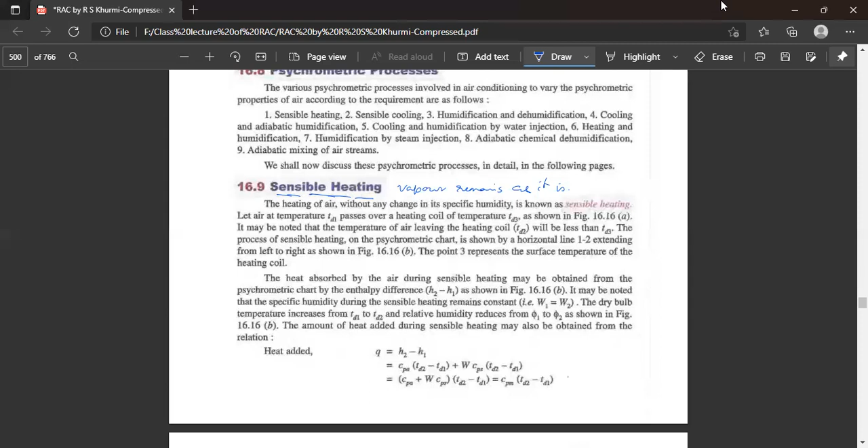Here the air is coming in, with temperature TD1. The heating coil shown here has steam moving inside it, so it is heated more or less at the temperature of the steam. The air passes over this coil and gets heated, coming out at temperature TD2.

So what happens? The air at temperature TD1 passes over the heating coil of temperature TD3. It must so happen that the temperature of the heating coil is TD3, and the temperature of the air coming in is TD1. The temperature of air leaving the heating coil will be less than TD3, but more than TD1.

So in the process of sensible heating on the psychrometric chart, point 3 represents the surface temperature of the heating coil.

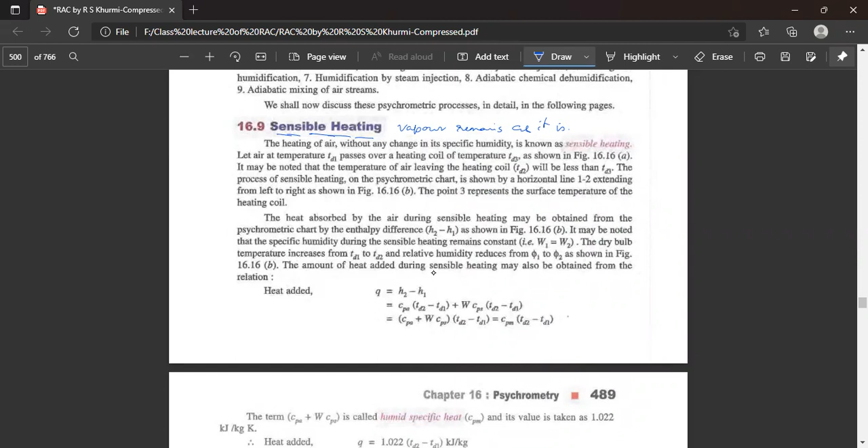The sensible heating, sensible cooling - now, the heat absorbed by the air during sensible heating may be obtained from the psychrometric chart by the difference H2 minus H1, where H2 is the enthalpy or heat content at the heating coil, and H1 is the heat content of the incoming air.

The amount of heat added is given by H2 minus H1, where the specific humidity during sensible heating remains constant, that is W1 is equal to W2. So the amount of vapor present in the system is not supposed to change - specific humidity remains constant.

Now, what is the sequence? Point 3, the heating...

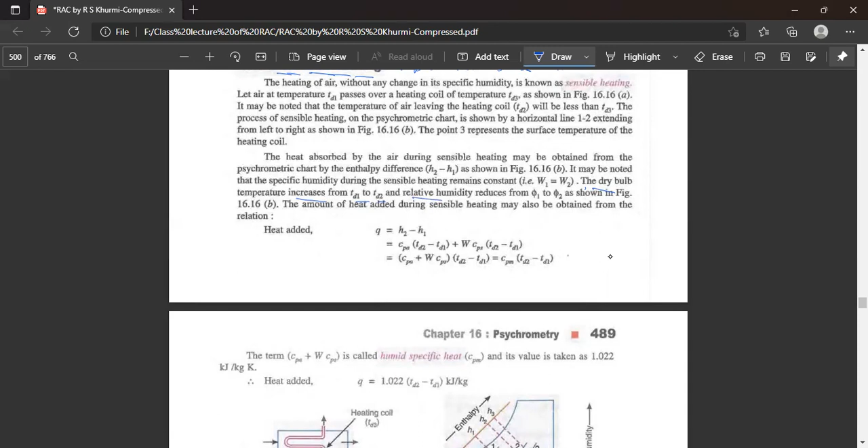The heat absorbed by the air during sensible heating may be obtained from the psychrometric chart. As told, the specific humidity - amount of moisture present per kg of dry air - is not changing, remains constant, that is W1 is equal to W2. The dry bulb temperature increases from TD1 to TD2, and the relative humidity reduces from phi1 to phi2, as the chart follows. So what is going on here?

W1 remains the same, and the temperature increases from TD1 to TD2, and relative humidity reduces from phi1 to phi2.

The amount of heat added during this sensible heating is defined by the relation H2 minus H1, or Cp(TD2 minus TD1), plus W times Cps(TD2 minus TD1) - meaning specific heat of dry air multiplied by the temperature rise due to passage of this volume of air over the heating coil, which causes the change from TD1 to TD2, plus W into Cps, that is the amount of moisture present in the air multiplied by the specific heat of the moisture multiplied by the temperature rise.

So after simplification, we get Cpa plus W times Cps, times (TD2 minus TD1), is equal to Cpm times (TD2 minus TD1).

The term Cpa plus W Cps is called humid specific heat, and its value is given as 1.022. But we have this specific heat, which is defined as humid specific heat.

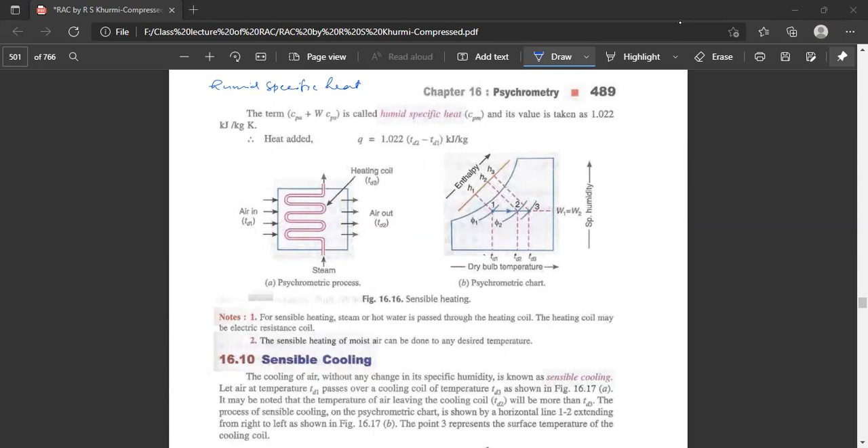Now, what is sensible cooling? Cooling of air without any change in specific humidity is defined as sensible cooling. Air at temperature TD1 passes over a cooling coil of temperature TD3, and it may be noted that the temperature of air leaving the cooling coil, TD2, will be more than TD3.

So here, the temperature TD2 will be more than TD3. The incoming air temperature is given as TD1, and the temperature of air going out from the system is known as TD2. The cooling coil carries cold water or cold air at temperature TD3, which is less than TD2.

The process of sensible cooling is shown here. The respective points: TD1 is plotted here, which is the maximum. TD2 is next, the temperature of the cooling coil, and TD3... I'm sorry, TD2 is the temperature of the cooled air coming out of the psychrometric cooler.

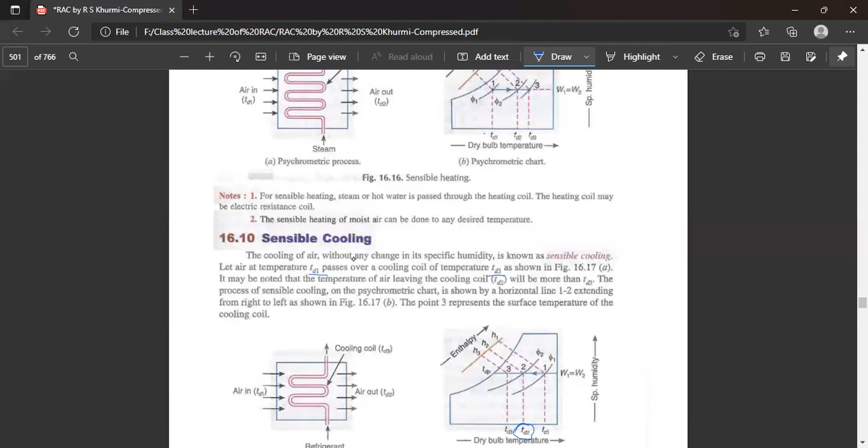The heat rejected by the air during this sensible cooling can be obtained from this chart as H1 minus H2. The amount of heat rejected is the amount of heat present in the incoming air minus the amount of heat going out with the outgoing air, which is the enthalpy difference H1 minus H2.

It can be noted that the specific humidity during sensible cooling remains constant, meaning the amount of moisture present in the air is not changing, it remains as it is. The dry bulb temperature reduces from TD1 to TD2, and the relative humidity increases from phi1 to phi2.

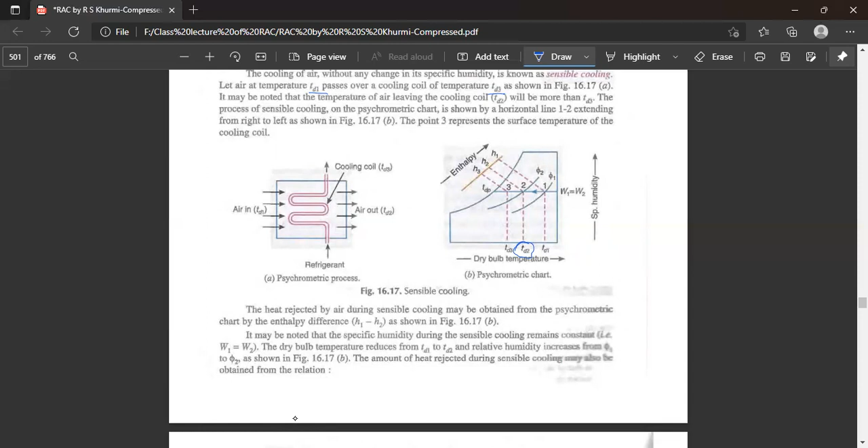The amount of heat rejected during sensible cooling can be obtained from the same relation as above. That is, Q equals H1 minus H2, which is CPA multiplied by TD1 minus TD2, plus W times CPS multiplied by TD1 minus TD2, where TD1 is the temperature of the incoming air and TD2 is the temperature of the outgoing air. W is the specific humidity of the supplied air, meaning the amount of moisture present per kg of dry heated air, multiplied by the specific heat of moisture, multiplied by the temperature drop of the incoming air passing through the coil.

So CPA plus W CPS multiplied by TD1 minus TD2 is equal to CPM. This term is called humid specific heat, CPM, and its value is equal to 1.022. Thus, Q is equal to 1.022 times TD1 minus TD2.

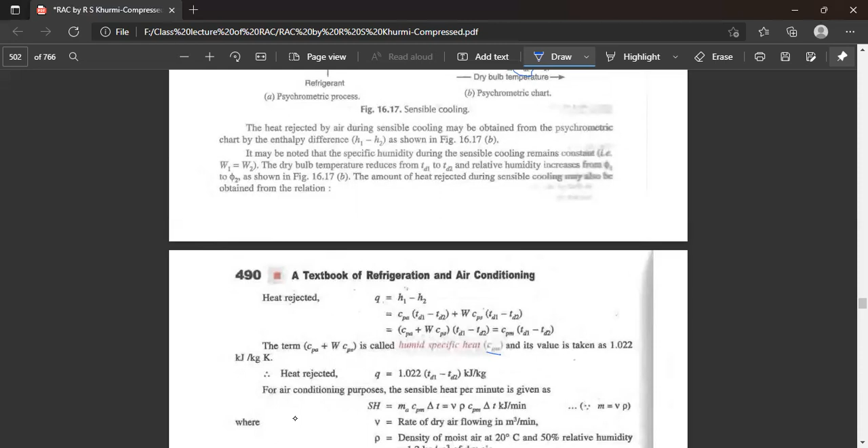For air conditioning purposes, the sensible heat per minute is given as SH, sensible heat, equals mass of air flowing multiplied by CPM multiplied by delta T, or rho into V, where mass equals the volume of flow multiplied by the density of the air, multiplied by specific heat, multiplied by the rise or fall in temperature.

So the rate of dry air flowing in cubic meters per minute is given as V here, and the density of moist air at 20 degrees centigrade, 50% relative humidity, is given as 1.2 kg per cubic meter of dry air. CPM, humidified specific heat, is 1.022 kilojoules per kg per degree Kelvin.

Thus, the density of moist air at 20 degrees centigrade and 50% relative humidity is equal to 1.2 kg per cubic meter of dry air. CPM, humidified specific heat, is equal to 1.022 kilojoules per kg per degree Kelvin, and delta T is TD1 minus TD2, the difference of dry bulb temperature between the air entering and leaving condition in degrees centigrade.

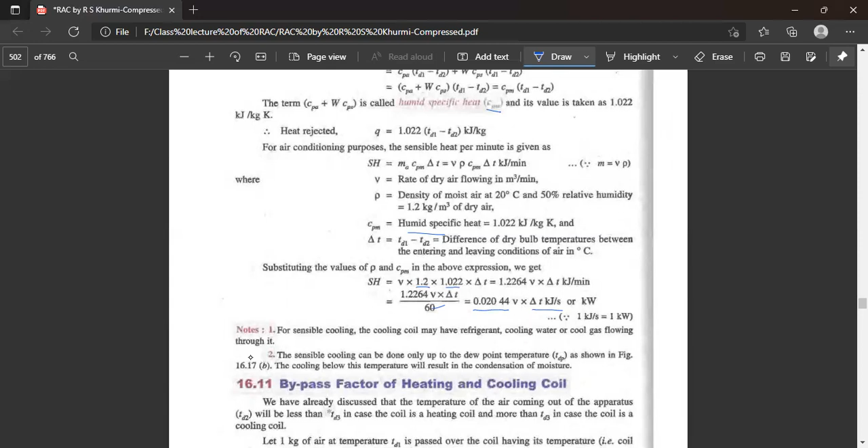By this equation, the amount of heat for cooling is 1.022 into TD1 minus TD2 kilojoules per kg, and the amount of heat added for sensible heating is given as 1.022 into TD2 minus TD1.

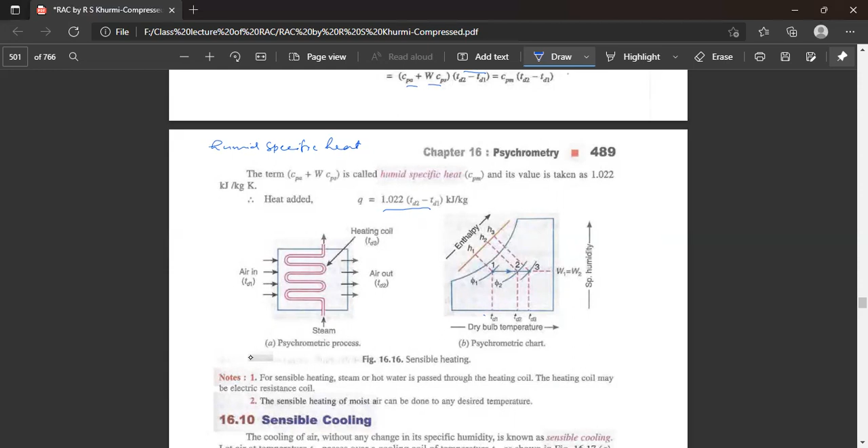As we are mostly interested in cooling the air which is coming inside, we are more interested in sensible cooling than sensible heating, but more or less essentially they are the same. The next topic is another term known as the bypass factor.

We have already discussed the temperature of the air coming out of the apparatus will be less than TD3 in case the coil is a heating coil, and more than TD3 in case the coil is a cooling coil. So there is air coming in, maybe in a hot state or cold state, at a certain temperature given as TD1, and the temperature of the air coming out of the apparatus is given as TD2. It must be less than TD3 in case of a heating coil, and must be more than TD3 in case of a cooling coil.

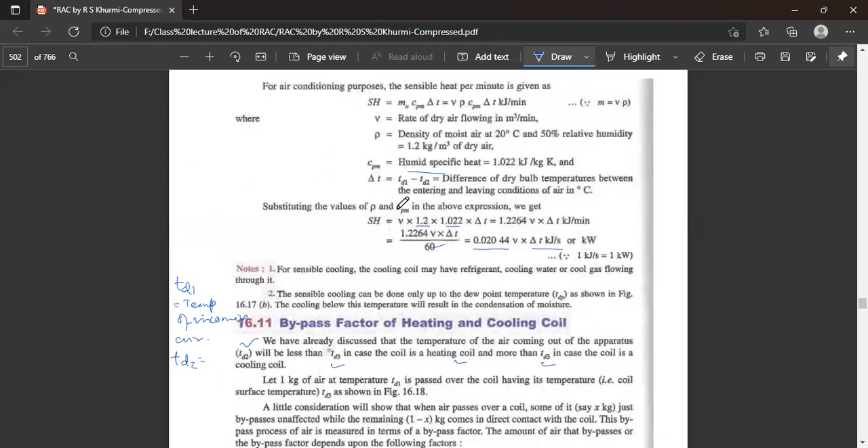So what we are having: TD1, temperature of incoming air; TD2, temperature of outgoing air; and TD3, temperature of the cooling or heating coil.

Now it is very clear that the temperature of the air coming out of the apparatus, TD2, will be less than the temperature TD3 in case the coil is a heating coil, and more than TD3 in case the coil is a cooling coil. So for a heating coil, the temperature of the outgoing air is less than the temperature of the heating coil, and in case of a cooling system, the temperature of the air coming out is more than the temperature of the cooling coil.

So what happens is the heating coil and cooling coil cannot fully heat or cool the temperature of the incoming air which is passing over it.

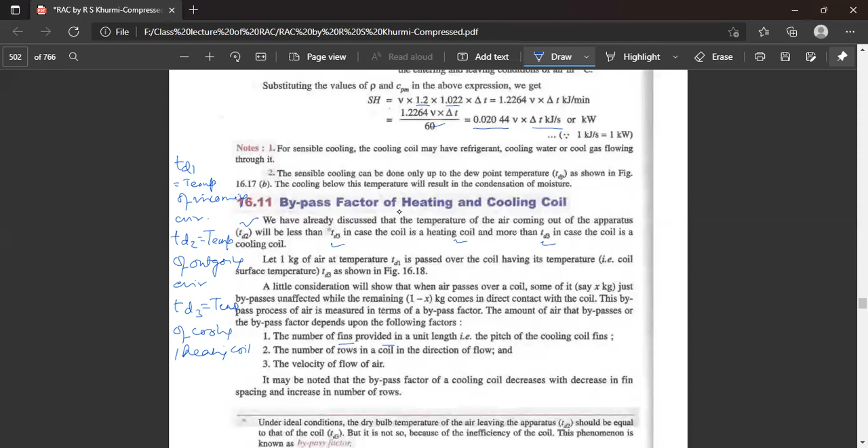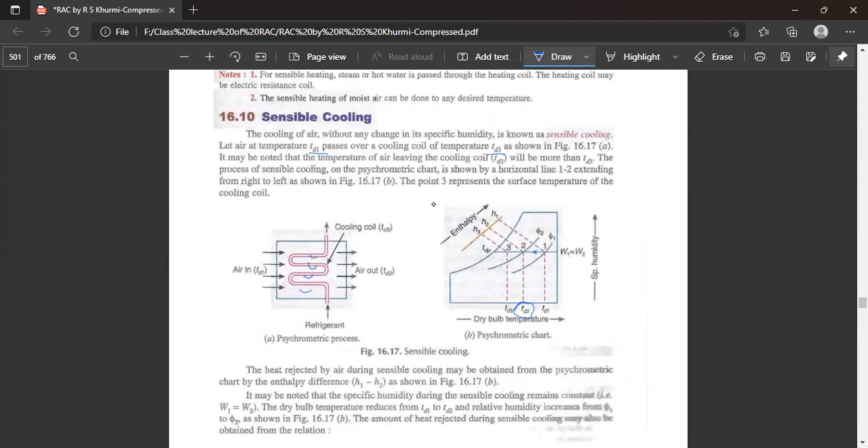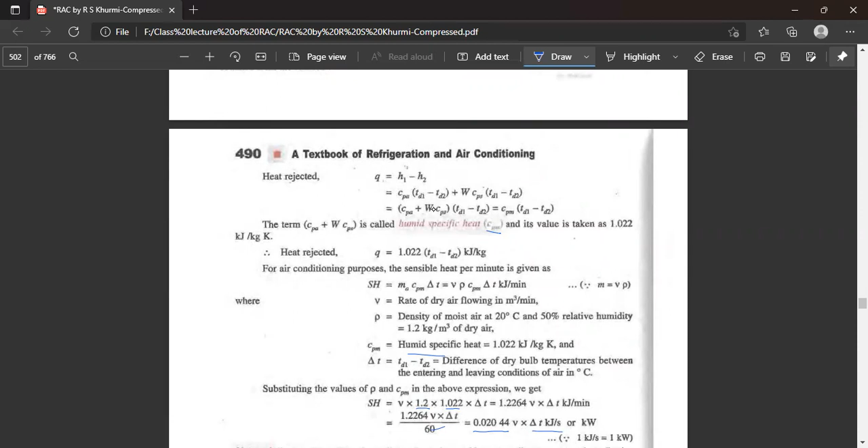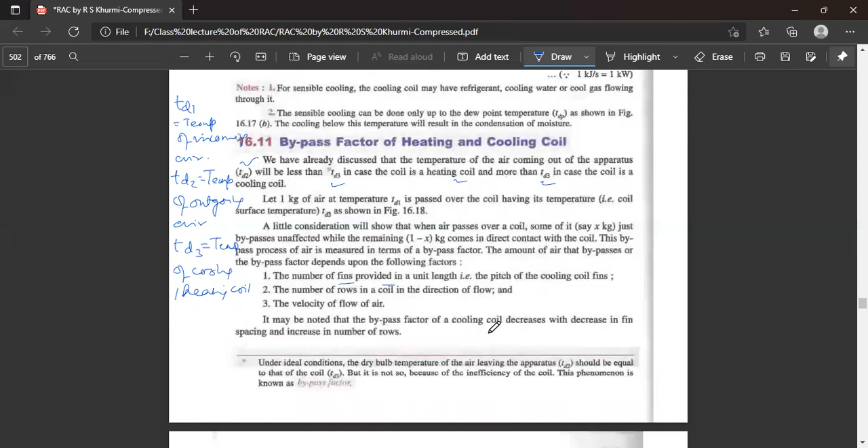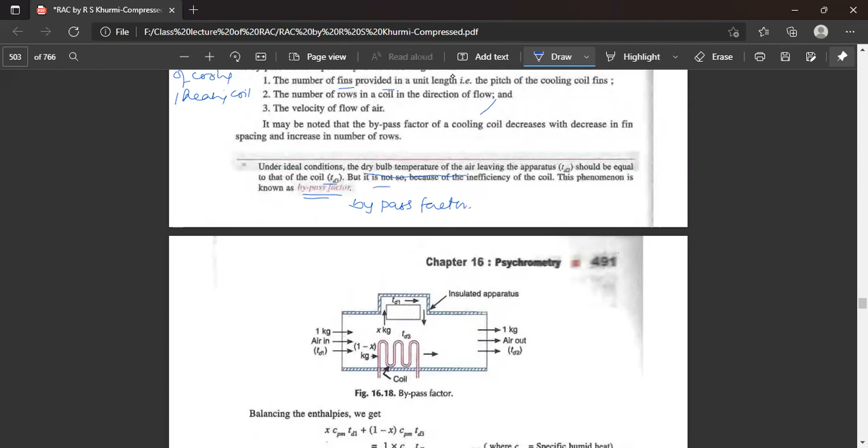So what is shown here? It is a coil here. One kg of air is coming in with temperature TD1. The temperature of the coil is given by temperature TD3, and one kg of air which is coming out is given by TD2. Here, this temperature TD2 is supposed to be equal to temperature TD3, which is equal to the temperature of the coil, but in actual practice it is never so.

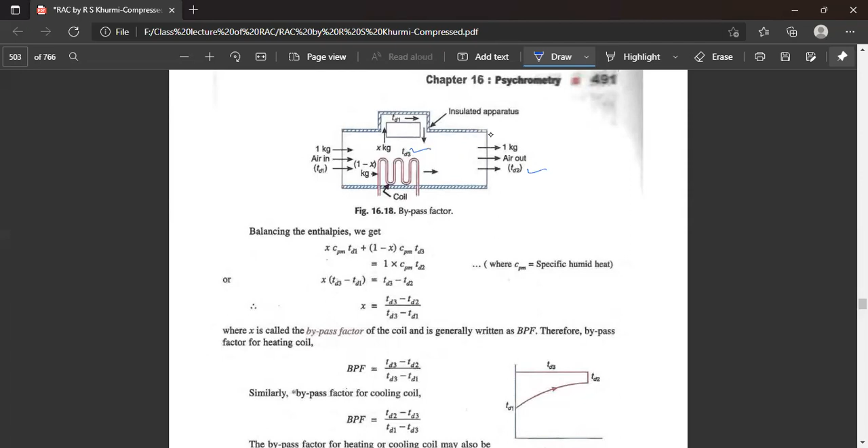Therefore, X is defined as the bypass factor of the coil.

Now BPF is equal to TD3 minus TD2, divided by TD3 minus TD1, where X is the bypass factor, generally defined as BPF. So BPF is given by TD3 minus TD2 over TD3 minus TD1.

The bypass factor of the cooling coil, in the same way, we have to calculate as TD2 minus TD3, where TD2 is the temperature of the outgoing air, TD3 is the temperature of the cooling coil, divided by TD1 minus TD3.

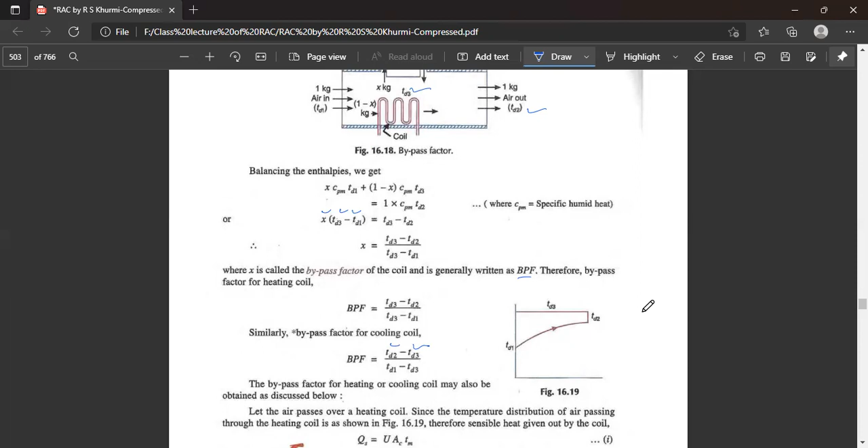The bypass factor for a heating coil may also be obtained as discussed below. Let the air pass over a heating coil. Considering the temperature distribution of the air through the heating coil, as shown in the figure below...

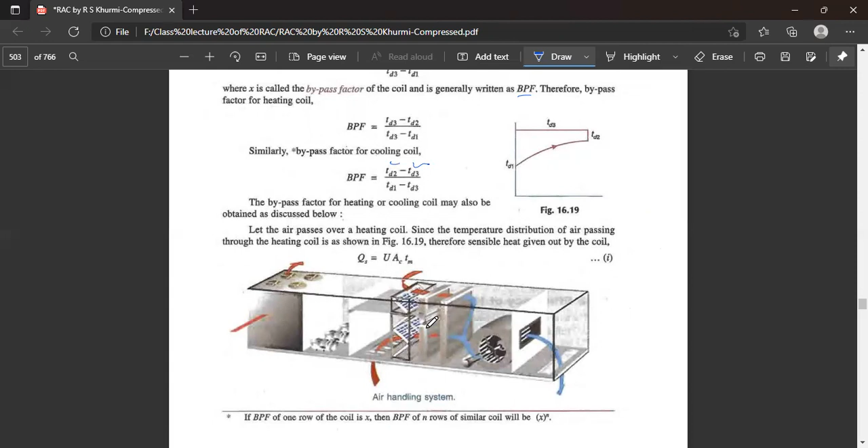The sensible heat given out by the coil is Qs equals U into AC into Tm, where U is the total overall heat transfer coefficient, AC is the surface area of the coil, and Tm is the logarithmic mean temperature difference.

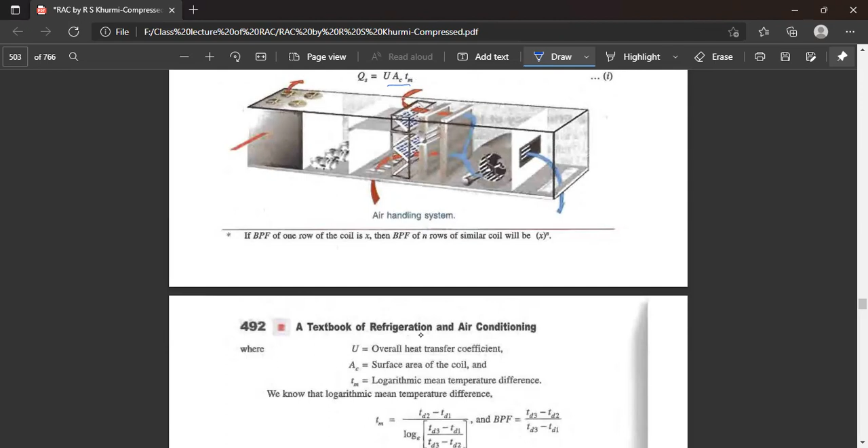We know the logarithmic mean temperature difference, which we calculated already: Tm equals (TD2 minus TD1) divided by log base e of (TD3 minus TD1) over (TD3 minus TD2). And the bypass factor is (TD3 minus TD2) over (TD3 minus TD1).

Now, the equation can be written again as U into AC multiplied by (TD3 minus TD2), and log of 1 divided by the bypass factor.

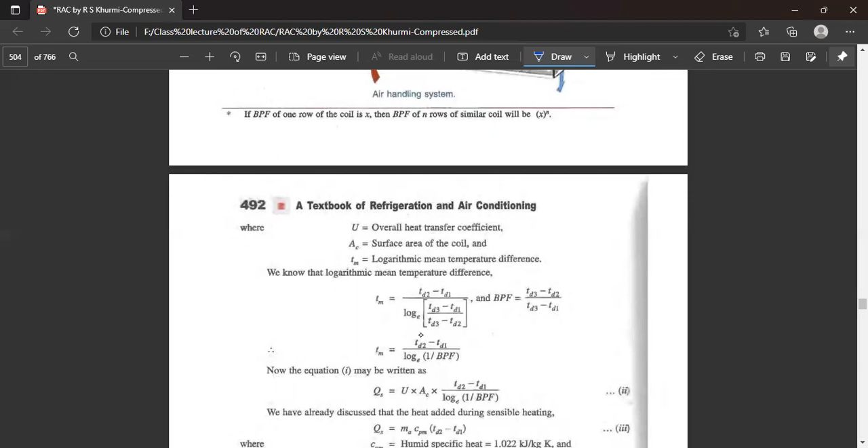We also discussed that the heat added during sensible heating is equal to Qs equals Ma into CPM into (TD2 minus TD1), where CPM is the humid specific heat at 1.022 kilojoule per kg K, and Ma is the mass of air passing over the coil.

If we equate this to the earlier equations, we get U into AC equals CPM log of 1 plus bypass factor, one divided by bypass factor, because the term TD1 minus TD2 cancels on both sides.

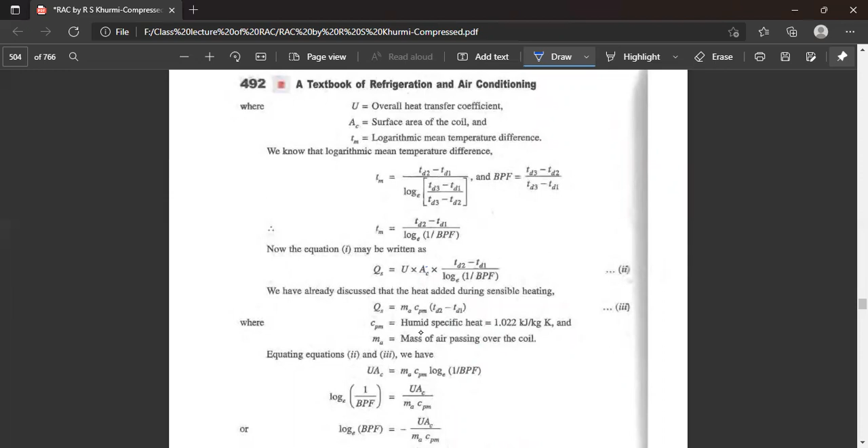So log (1 by bypass factor) equals UAC divided by M into CPM. Or log(bypass factor) equals minus UAC divided by MCPM, so bypass factor equals e to the power minus UAC divided by MCPM, or e to the power minus UAC divided by 1.022 Ma.

Following a similar type of discussion, we can derive this equation for a cooling coil. The performance of a heating or cooling coil may be measured in terms of its bypass factor. A coil with a low bypass factor has greater performance.

Now, the efficiency of the heating and cooling coil.

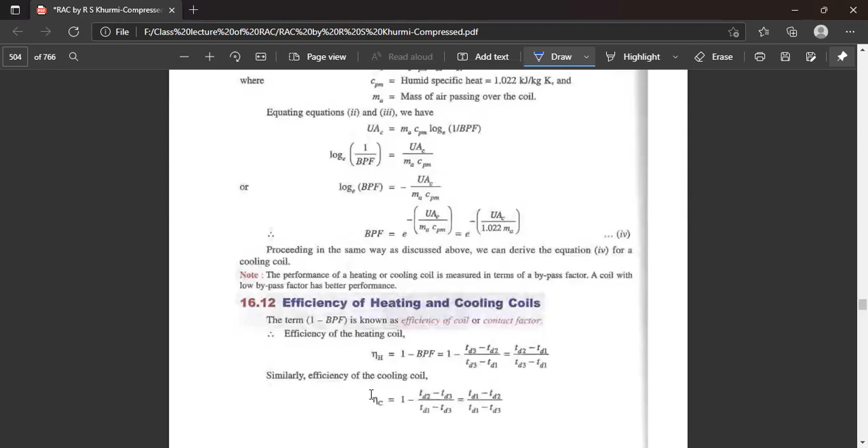The term 1 minus bypass factor is defined as the efficiency of a coil, or contact factor. So we have another factor, the contact factor, besides the bypass factor.

Now, the efficiency of the heating coil is 1 minus bypass factor, which is 1 minus (TD3 minus TD2)/(TD3 minus TD1); putting in the expected values and solving gives (TD2 minus TD1)/(TD3 minus TD1). Similarly, the efficiency of the cooling coil is 1 minus (TD2 minus TD3)/(TD1 minus TD3), or (TD1 minus TD2)/(TD1 minus TD3).

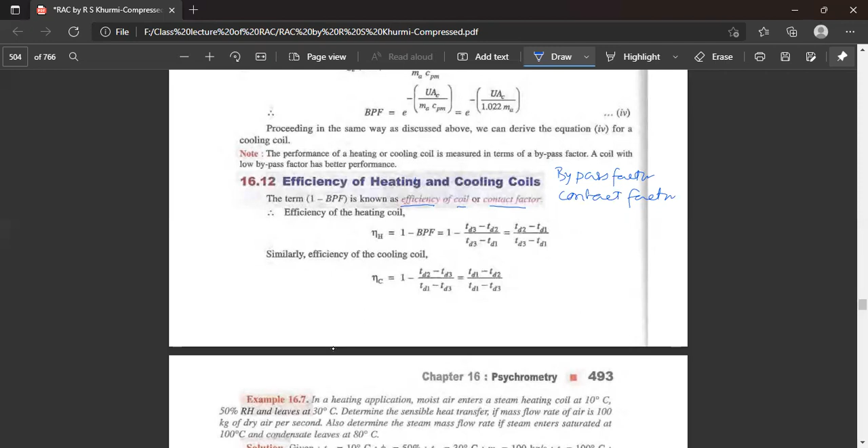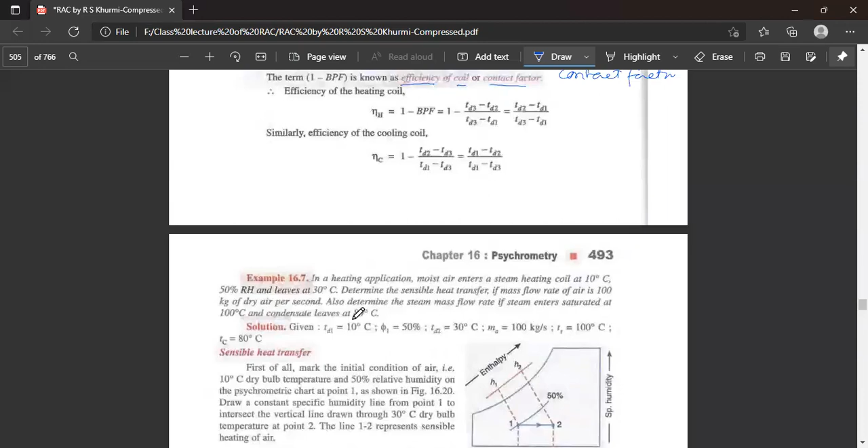Let us go through a few problems.